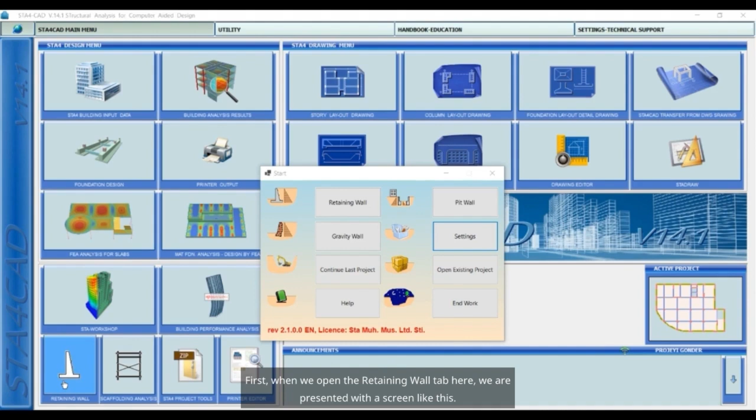First, when we open the retaining wall tab here, we are presented with a screen like this. On this screen, we initially encounter console type retaining wall structures. If there is such a retaining wall, you will solve it from here.

If you have a gravity wall, then you can select the option below. Here, you can choose your material as either stone or concrete. Alternatively, as shown here, we have the pit wall option.

If you have a retaining structure like this instead of that type, then you can model it using this option.

Besides that, we have our settings section here. From the settings section, you can adjust the language, and after modeling the retaining structure, it allows us to analyze and export drawings in DXF format. You can select the DXF format here.

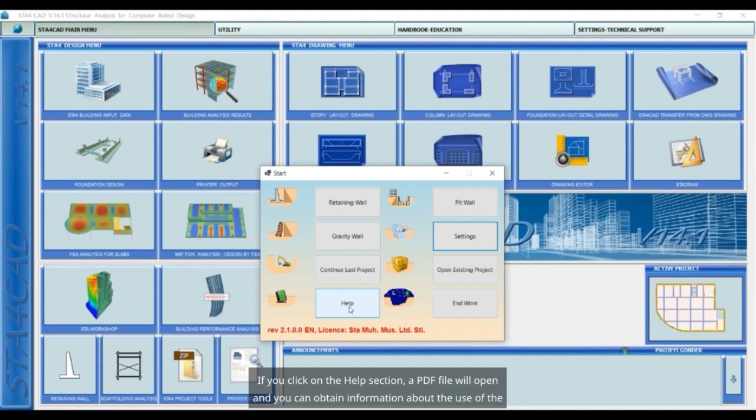In addition, we have a help option available here. First of all, you can get information from here before starting the retaining wall module. If you click on the help section, a PDF file will open, and you can obtain information about the use of the program through this PDF file.

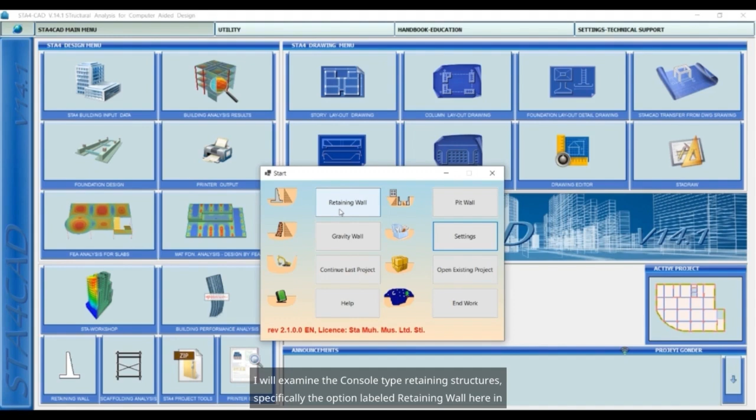I will examine the console type retaining structures, specifically the option labeled retaining wall, here in this video. Then I will briefly mention pit wall at the end and conclude my video.

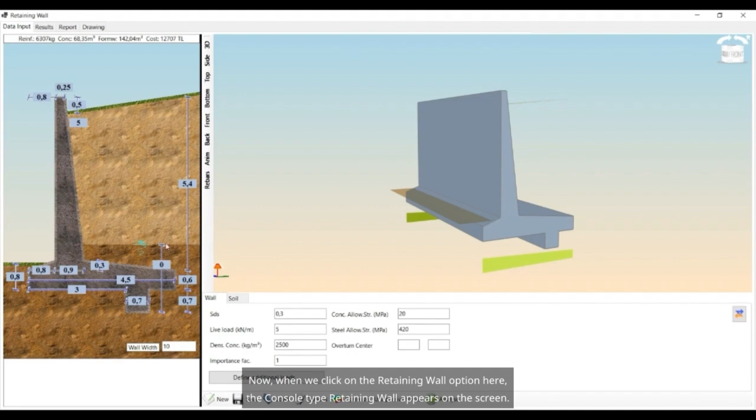Now, when we click on the retaining wall option here, the console type retaining wall appears on the screen. As you can see, there are dimensions here. We can play with the dimensions, change them from this section, and also select our wall width.

Here, we define the wall and ground properties. We input the seismic effects that occur here. If we have a live load, we enter those as well. Here, we input the unit volume of concrete.

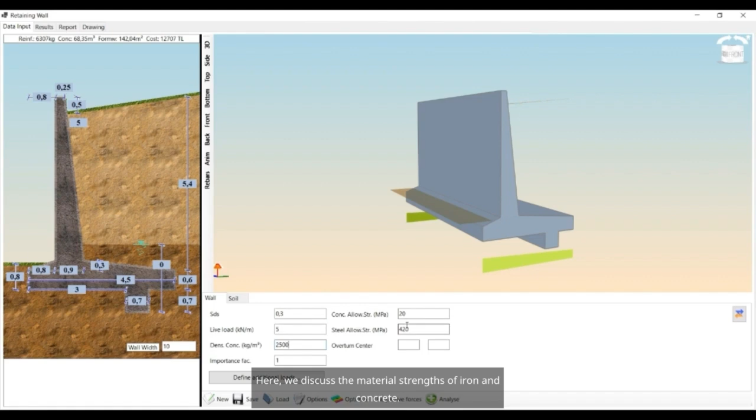Here, we discuss the material strengths of iron and concrete. Also, take a look at our overturn center section.

You do not need to enter any points here. When you do not enter any points, the program calculates for a lot of points by itself. It determines whether there is any sliding here, and for different center points.

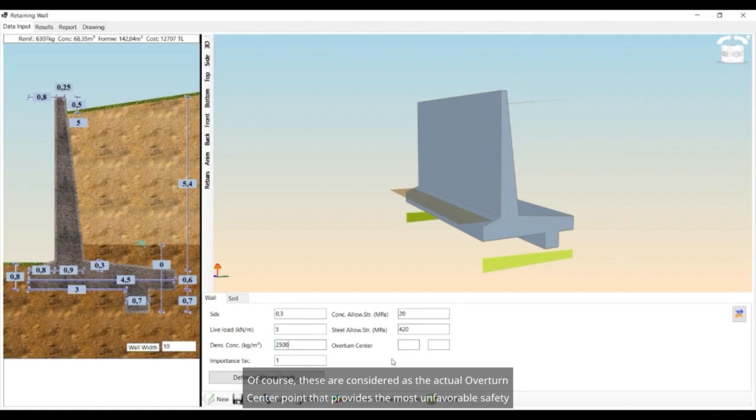Sliding surfaces are drawn considering different centers. Of course, these are considered as the actual overturn center point that provides the most unfavorable safety ratio. In other words, we are looking for the most unfavorable point here. But as I mentioned, you can also delve into any point you are curious about and examine the result there.

I will also leave the calculations to the program here. I will not directly enter any point myself.

Now, of course, if you want to open a new project, you can access these options from here. You can save your operations here from the load section. You can also call up a project you are currently working on and continue with the operations.

We have an options section. When you click on the options section, you can adjust both your static and design options.

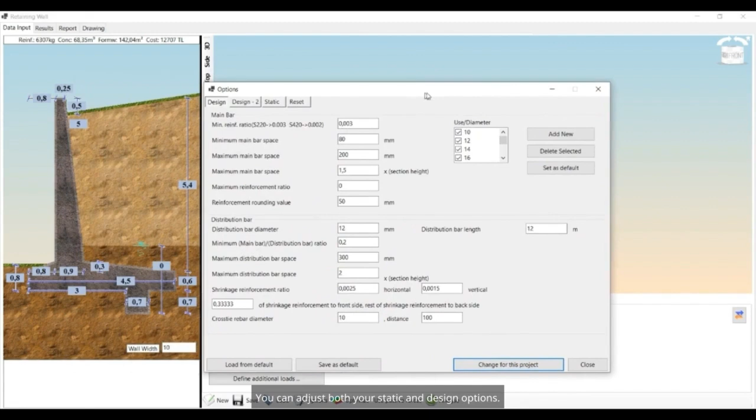You can select the reinforcement spacing and reinforcement diameters used here in the design section.

In the static section, our 2018 regulation is currently selected, and here you can see our safety factors. Here, for example, we have the wall overturning safety under seismic loading, and we take the coefficient as 1.3.

According to the regulations, what is actually mentioned here is as follows. For example, here we have an active soil load. This soil load is trying to overturn the retaining structure. The retaining wall resists this, for instance, with its own weight. It resists here due to the force created by its own weight, and the friction effect it generates on the surface. We are calculating the moments that attempt to overturn it.

We calculate the moments created by opposing forces. Here, the ratio of the moment created by the opposing forces to the moment created by the forces attempting to overturn must be at least 1.3 times. In other words, the safety factor that our regulation is referring to can be explained in this way.

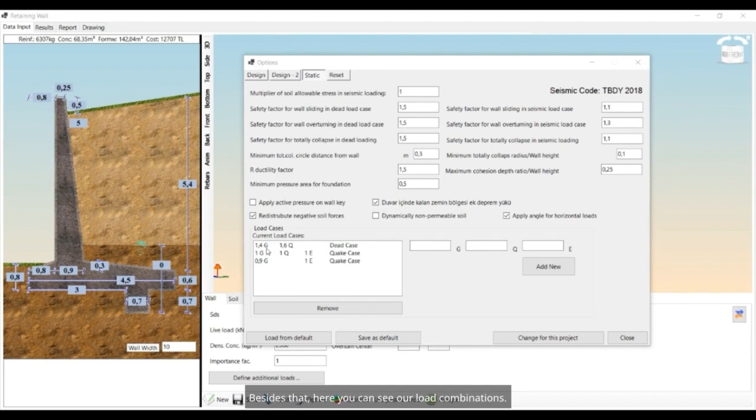Besides that, here you can see our load combinations. If you want, you can add different combinations and also view the resulting situations.

Yes, here, you can arrange these options according to whichever regulation you want. Of course, you can save this as a default setting or change it specifically for this project. Here, if you want the 2007 regulation, you need to click on that, and then click on this, like this.

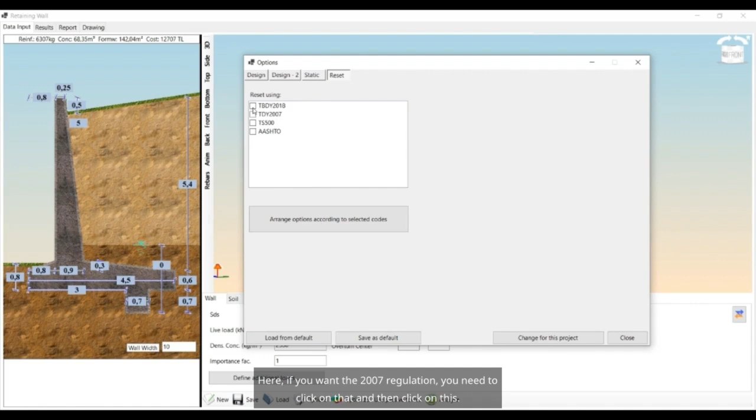Yes, we say to consider it according to the selected code. Right now, it has been considered according to the 2007 regulation. We are saying to change this for this project.

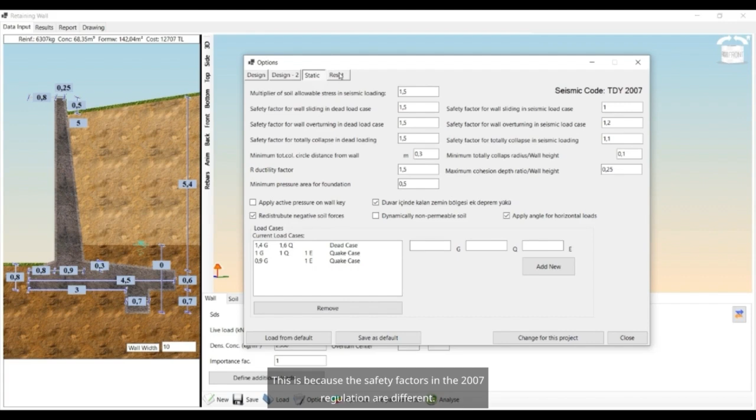So if we want to keep it as the 2007 regulation, we can do it this way. But if we want the default value to remain as the 2007 regulation in all projects we enter, then we need to click this. This is because the safety factors in the 2007 regulation are different, so it is taken into account accordingly.

Right now, I have brought it back to 2018. These are our options. Additionally, you can use passive loads here if you want, but if you don't use them, you will stay on the safer side.

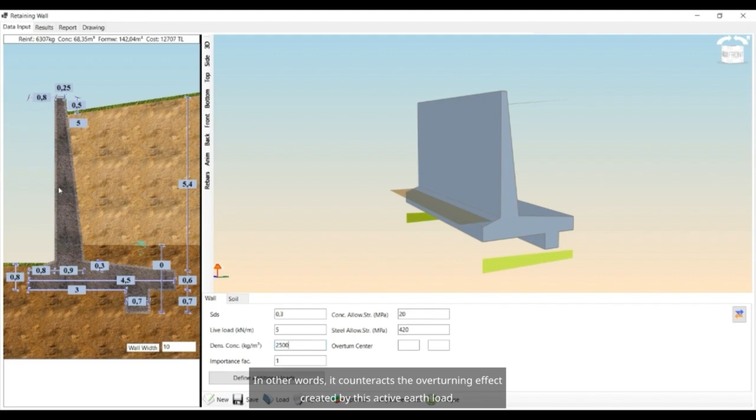Because passive loads are the effect of the soil here, the soil here is holding the retaining wall. In other words, it counteracts the overturning effect created by this active earth load. Here, a passive load is formed. If you do not take this into account, you will end up making calculations that are on the safer side.

Here, we have the option to optimize. When we click on the Optimize option, it shows us this. Let me explain right away.

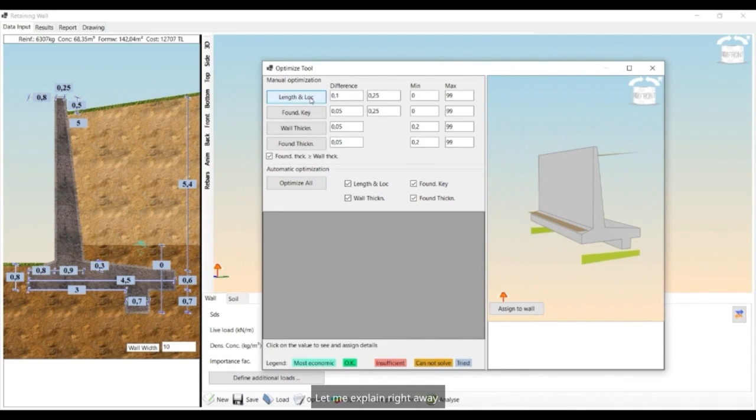Yes, at first glance, we have a lot of options here. Here we have the height of the wall. Similarly, we have the thickness of the foundation. Besides that, look here, we have our tooth optimization.

This is important. We have options related to tooth optimization and, of course, our base width here. Now, when examined, you can also have the program automatically optimize these, or when you change these values yourself, how does the optimization of the dimensions here work?

Here, in the first option mentioned initially, he talks about the foundation width. Here we have the difference section, which shows us the distances in between. Look, it goes with a difference of 0.4 and 0.5, meaning it varies by 0.1. In the horizontal part, it also varies by 0.25. This is shown here as well.

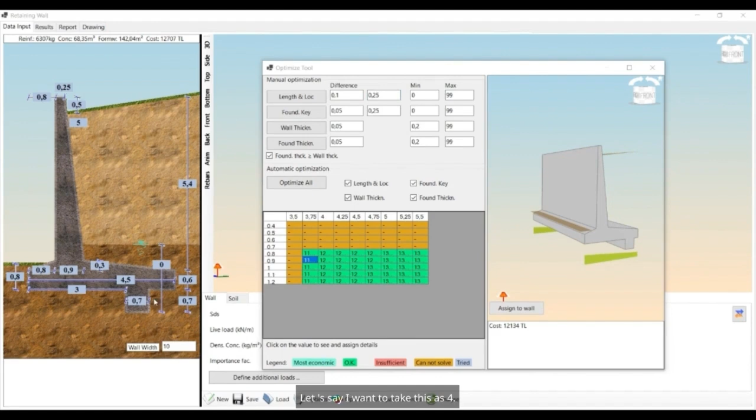It is actually optimizing these values. So right now, I have a value of 4.5 here. Let's say I want to take this as 4. What kind of result will I get when I take it as 4?

We will look at that now, and let's say I want to take this as 0.9 instead of 0.8, so here I am marking the option that corresponds to 0.9 and 4. When I mark this, I can also select a different sound option. Here, as you can see,

Changes are actually occurring in the relevant dimensions on this three-dimensional shape shown in the figure. Let me revert it to its original state. Yes, this is what I want right now.

And to implement this, in the project, I am checking the Assign to Wall option. This will assign these dimensions to the wall as well. As can be seen right now, I need to create a model like this.

There is no problem. The light is green, so it means okay here. It means you can do this. So, here, you can see the approximate costs.

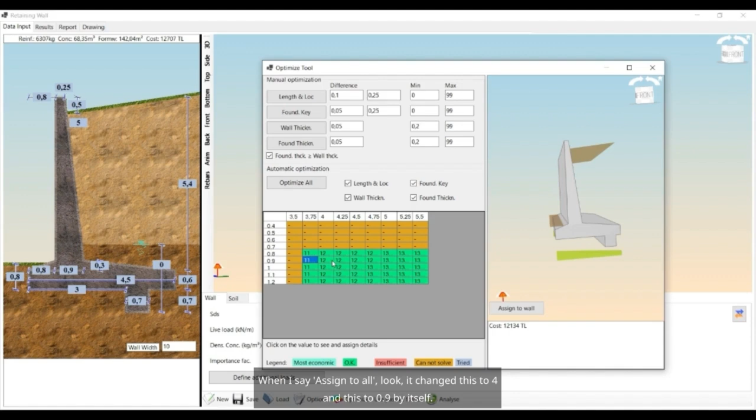Look, when I do it this way, the cost will be around 12,134 TL. This way, you can visualize the cost. When I say Assign to Wall, look, it changed this to 4 and this to 0.9 by itself.

In addition to this, as I mentioned here, we can optimize regarding the heel part, or you could say the tooth - we can perform an optimization related to this. Look at this 0.7 heel height. Here, the distance to the heel is 3 meters. You can optimize that. You can optimize the thickness of the wall, which ranges from 0.9 to 0.25.

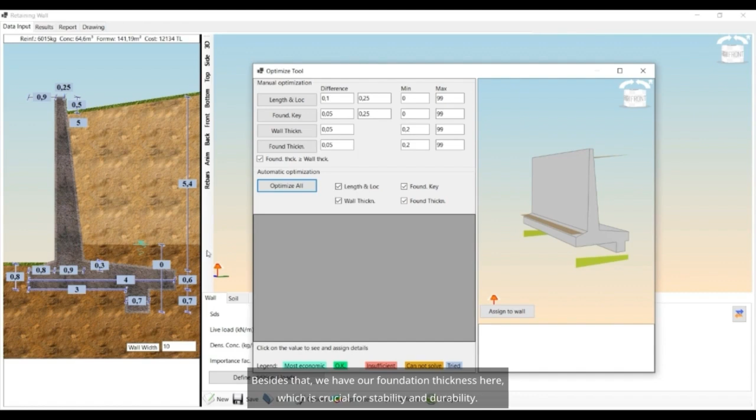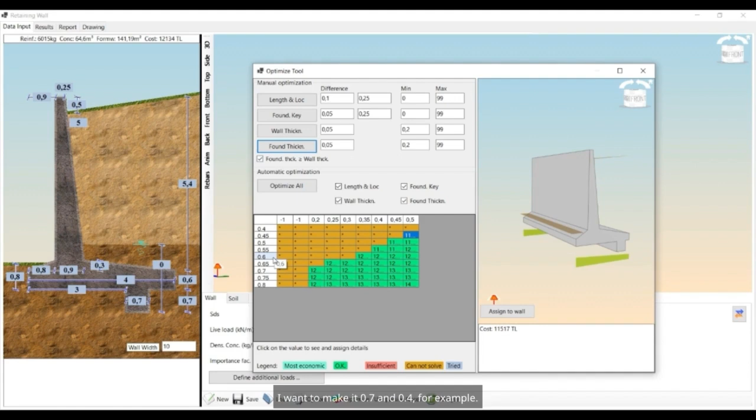Besides that, we have our foundation thickness here, which is crucial for stability and durability. At the end, when you come to the foundation thickness, yes, we have a thickness value of approximately 0.6 meters here, and a value of approximately 0.3 meters here. You would perform an optimization on these two values to ensure efficiency. I want to make it 0.7 and 0.4, for example.

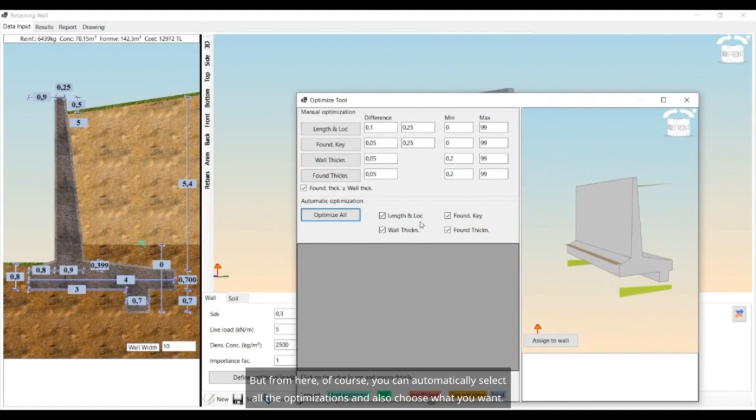I took this here, and when I clicked on Assign to Wall, as you can see, it changed these as well. But from here, of course, you can automatically select all the optimizations and also choose what you want.

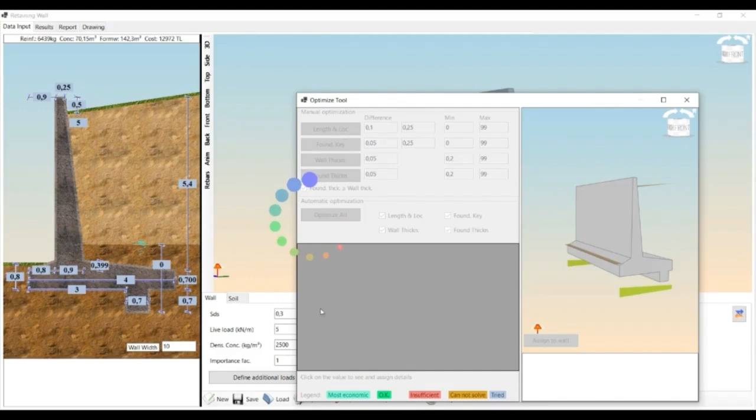You can also perform automatic optimization. It is currently carrying out the optimization, and according to that, it will adjust the dimensions. Finally, it will also display the cost for us, and you can view how much profit you have made from here. The program will automatically perform the optimization for you. Yes, right now look, the fees are written here, so there has been a drop of more than half. At this moment, I performed an automatic optimization.

Yes, I say OK here—if you say Assign to Wall, it will automatically assign this optimization result. I didn't take any action because I didn't want any optimization. If you want to do it, as I said, you can click on that option.

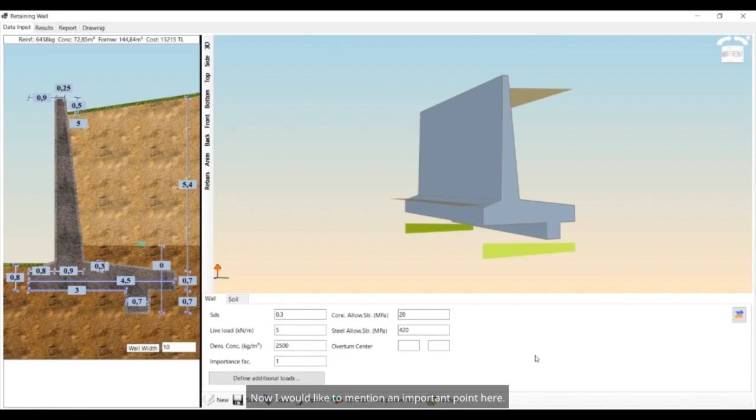Now I would like to mention an important point here. It is not very possible to save your retaining wall under high earthquakes or high elevations. When you encounter such situations, you will see that when your earthquake increases to a certain extent, or when you have a larger heel height here, you need to make the wall height much larger, and you will already notice that it is not sufficient.

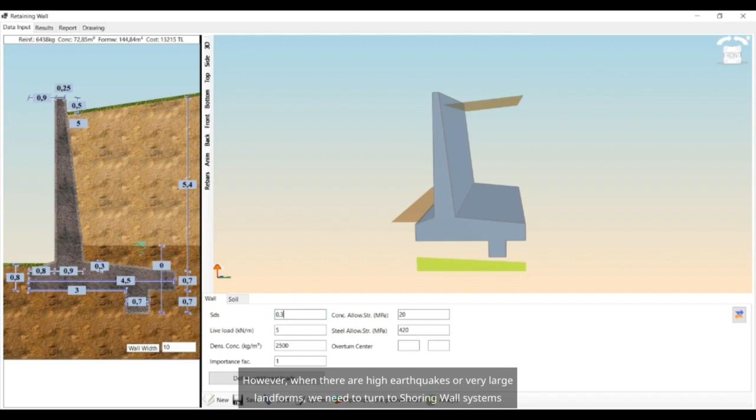In such cases, I took 0.8, and even that is currently not sufficient. For small earthquakes, you can certainly manage this by adjusting the dimensions. However, when there are high earthquakes or very large landforms, you need to turn to shoring wall systems instead of constructing a retaining wall. Otherwise, you will not be able to save the structure. Related to the modeling of the retaining wall in such situations, what you need to do is turn to the shoring wall system.

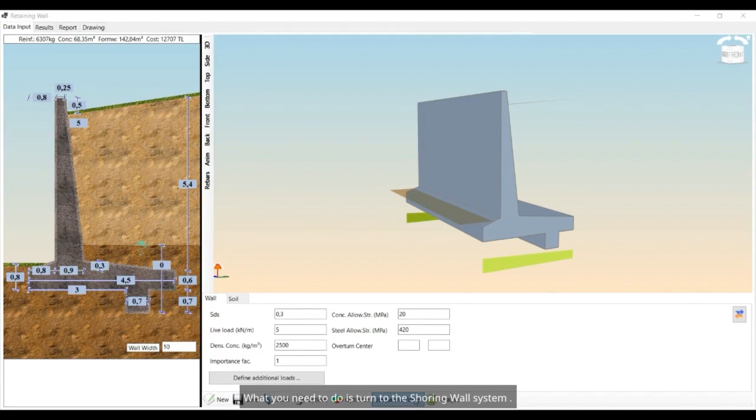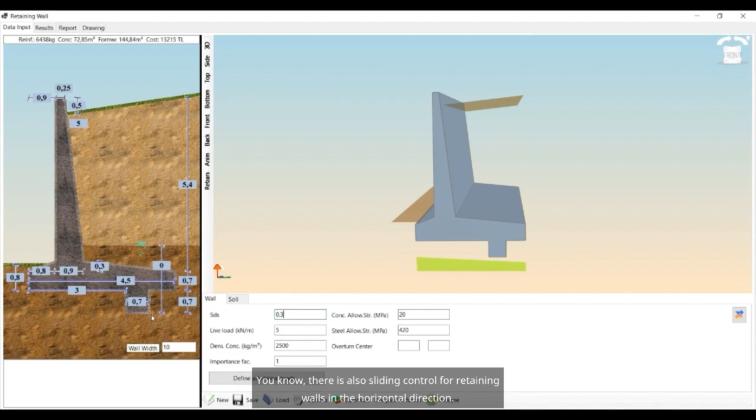Besides that, look here, this heel section is very important. The heel section especially has a braking effect, provides control against shear effects from horizontal forces. There is also sliding control for retaining walls. In the horizontal direction, your heel has a very important function against this slipping. Therefore, the height of this heel needs to be at a certain value.

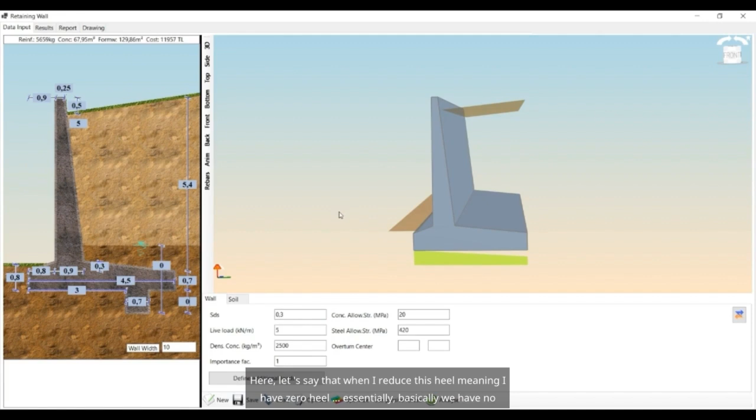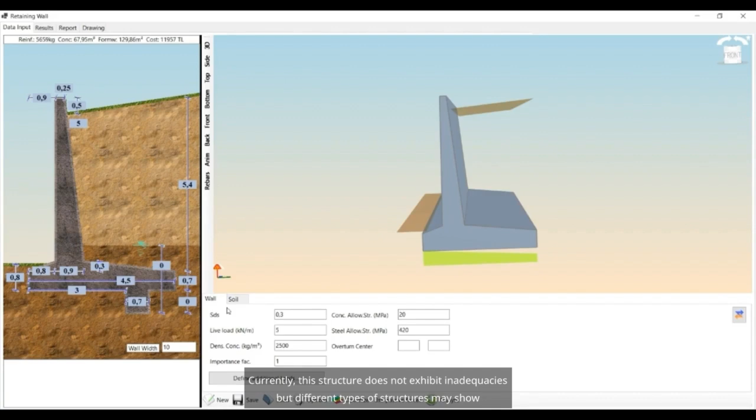Here, let's say that when I reduce this heel, meaning I have 0 heel, basically we have no heel. In that case, the likelihood of experiencing deficiencies is high, so it is beneficial to have some form of heel. Currently, this structure does not exhibit inadequacies, but different types of structures may show inadequacies. This is important—the support geometry should be understood. It's necessary not to deviate too much from this geometry.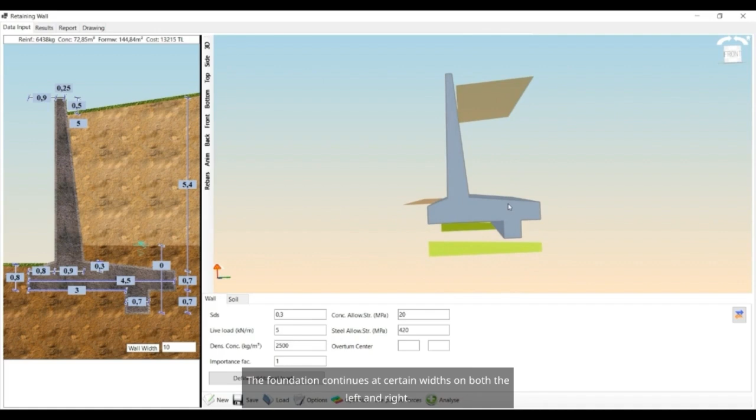Here, a wall comes from this point, and there is a section on both sides. The foundation continues at certain widths on both the left and right. Placing the wall in the corner and constructing it from only one side is not a correct approach. In other words, the wall must have a certain distance from both sides—it needs to be positioned in between. It cannot be at one endpoint. Such geometries are not a correct approach. It is important that you do not go outside of this geometry.

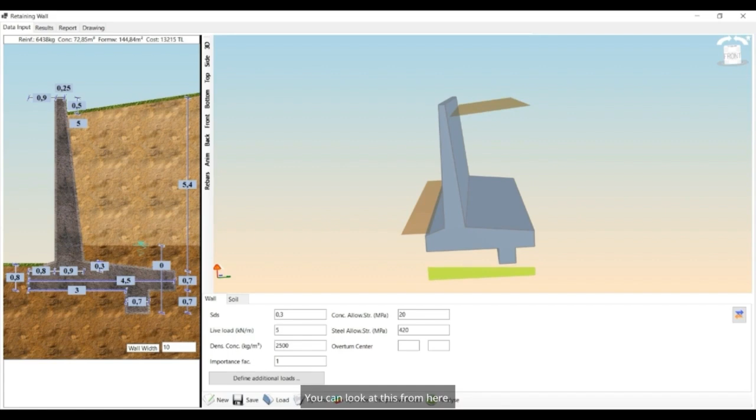Besides that, look here, you are also adjusting the angle. With this value, the soil loads are currently coming in at a slope of 5 degrees. For example, you set the angle to 10, and you can see that there is a change observed—you can look at this from here. That's why, as I said, when your earthquake loads become excessive, if you increase the height here, we will see that it won't help. Yes, this is what I currently have to say regarding the retaining wall.

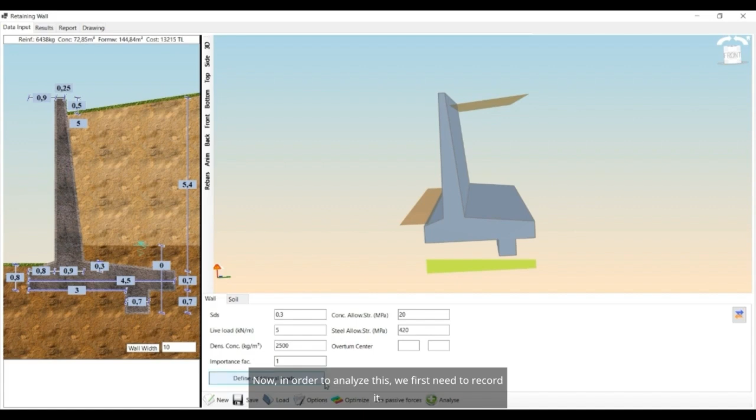Now that we have specified all the dimensions, we can move on to the analysis section. Of course, if we have groundwater here, we need to consider the groundwater level as well—I am currently assuming it should be present. Now, in order to analyze this, we first need to record it. Yes, if you press the save button. Yes, I will register a data here.

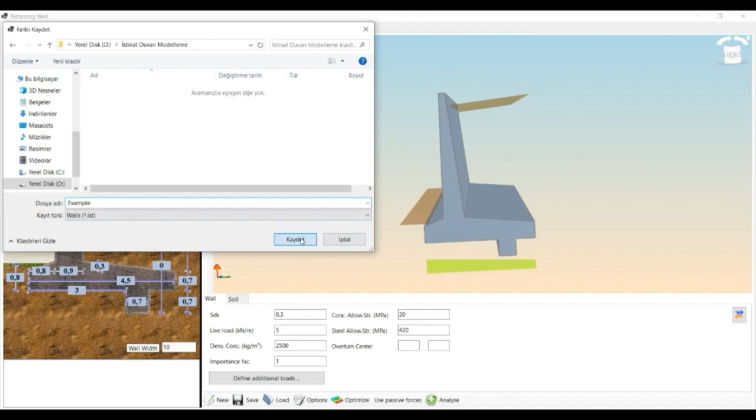Yes, my data is currently registered, and here I am pressing the Analyze button. He is currently performing an analysis. Yes, he has finished the analysis and has immediately presented the results to me.

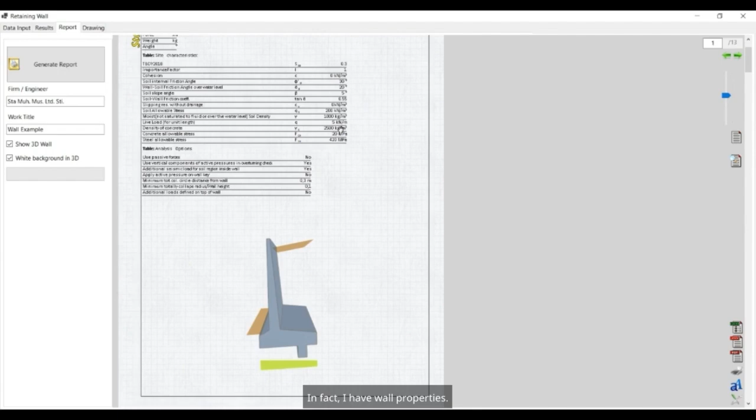Here are my element properties. In fact, I have wall properties, the selected properties found here. Here are my dimensions and the drawing. After that, the calculation section starts in detail. The loads are shown here. Here you can see the active soil load. An analysis is being conducted under these loads.

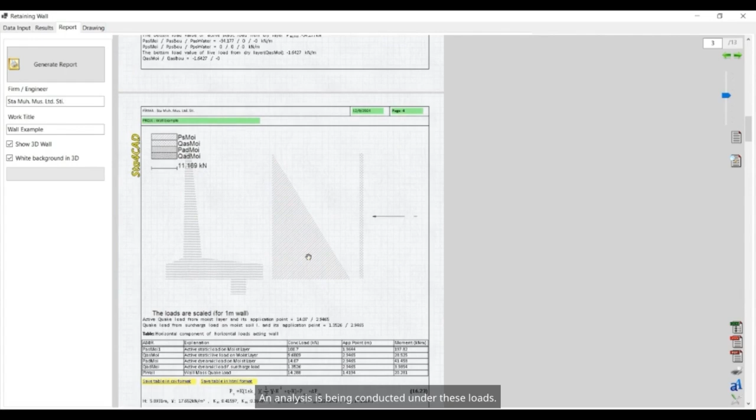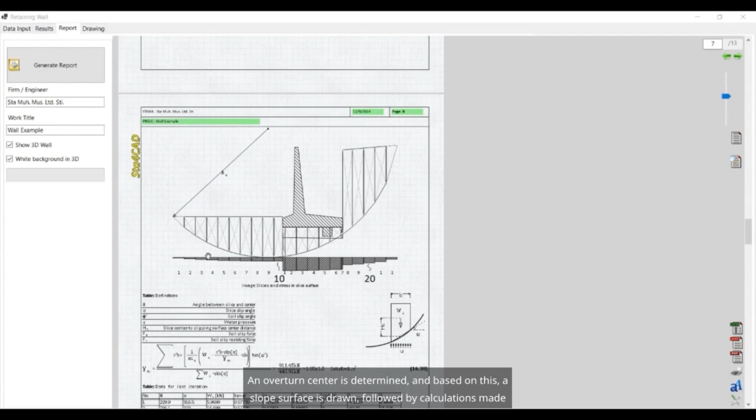Yes, as a result, you can see that wall overturning and sliding checks are being performed here. Yes, after these are done, take a look there. An overturn center is determined, and based on this, a slip surface is drawn, followed by calculations made with a safety factor.

This is calculated for both earthquake and non-earthquake conditions. Here it shows that it was done under earthquake loading.

We already went directly into the report here, but when we reach the analysis results, we also have reinforcements, etc. You can visualize these in the same way.

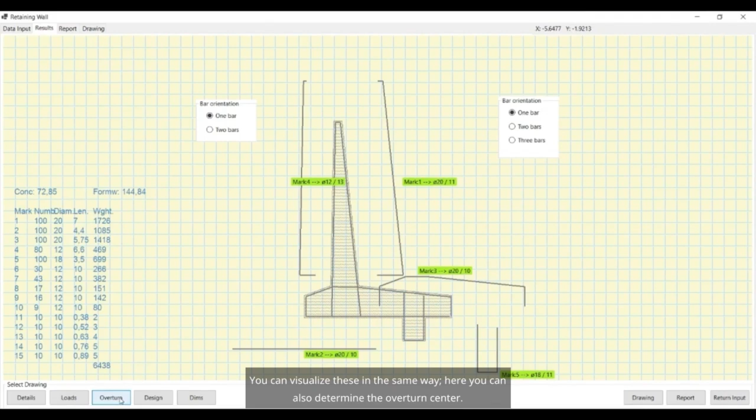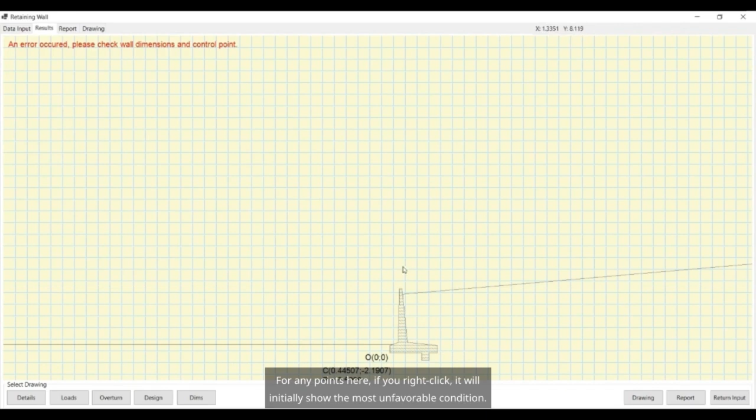Here you can also determine the overturn center. Click on any point, you can check it yourself. For any points here, if you right-click, it will initially show the most unfavorable condition. In other cases, it will be larger anyway.

The factor of safety section here is important. You can see that, these are already written here. A lot of schematic lines have been taken and it is written under the conditions that arise from them.

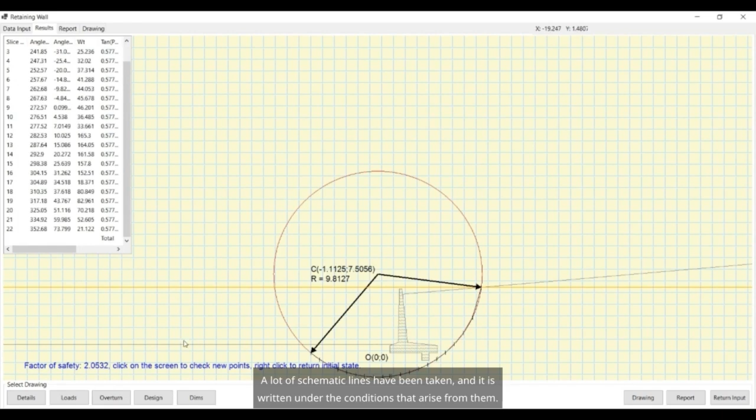Here in the design section, you can see that we have our reinforcement. It states the required area here as well, which is 8.4 square centimeters. Based on this, you can change the reinforcement selection yourself.

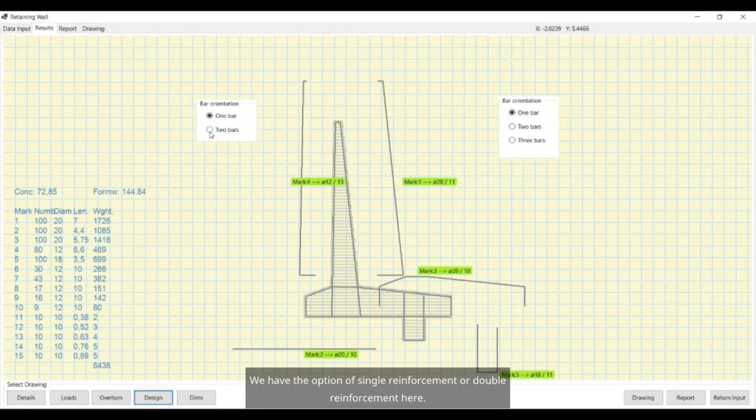Here, your quantity takeoff is also being done. This is important. We have the option of single reinforcement or double reinforcement here. You can specify these as you wish, and accordingly your quantity takeoff will change somewhat.

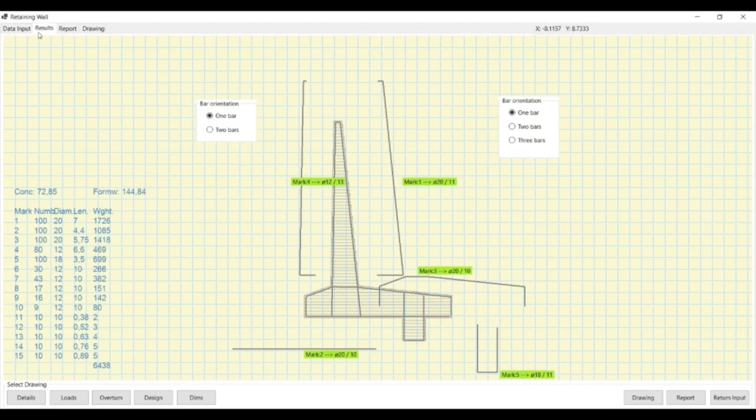You can select these. These are important. Besides this, the report shows the reinforcement. After these have been provided, the given reinforcements are written here as a report.

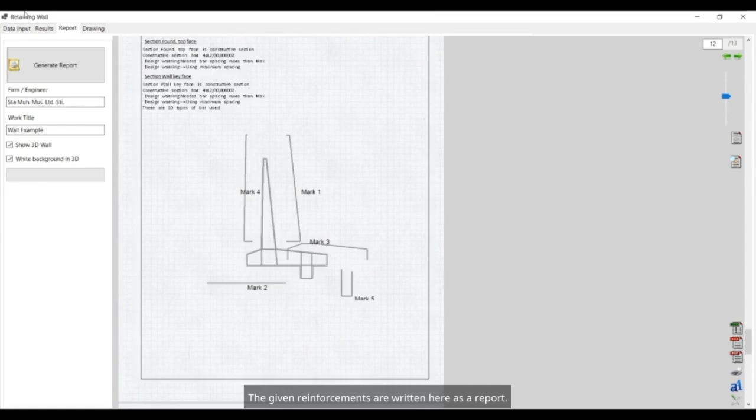Here, I actually want to point out a specific aspect of the data entry. If you are going to apply an extra load, you can enter it yourself here. Let's say you will enter a vertical PV load or a horizontal PH load.

You can divide these by the relevant wall width and treat it as a single dynamic load. You can also define an additional load.

Let's talk about the natural wall properties here. We also had soil properties, these are important as well. The data pertaining to our soil is here.

You need to enter the specific weight of the liquid. Besides that, let our specific weight of the moist ground be entered. Of course, this part is very important.

There is the friction angle of the ground surface here. We also have the shear resistance angle here. These are important factors, we need to enter them correctly.

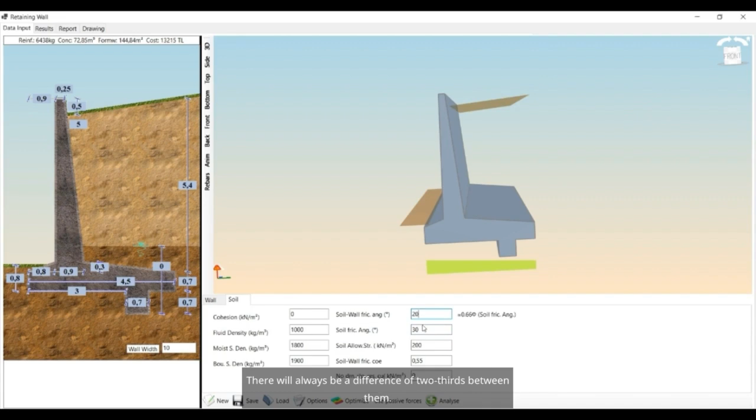Here you also need to enter a value in the first option that is 2/3 of the value you entered. There will always be a difference of 2/3 between them. The friction angle of the ground surface needs to be 2/3 of the shear resistance angle.

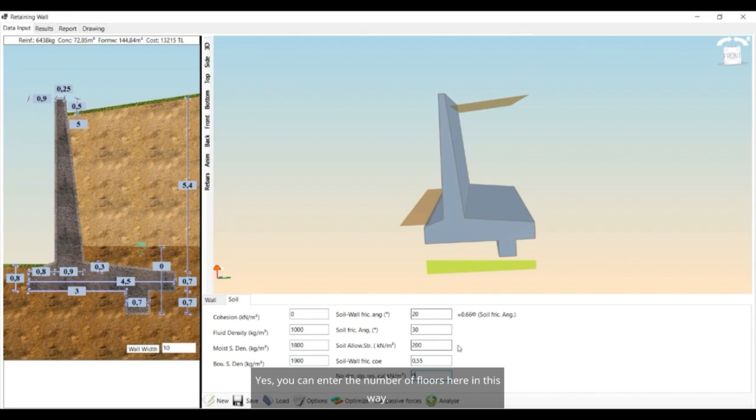Now, regarding the analysis results, yes, you can generate a report in this manner. As I mentioned, you can print the report as a PDF from here. If you are looking for something specific in the report, you can find it by typing its name here.

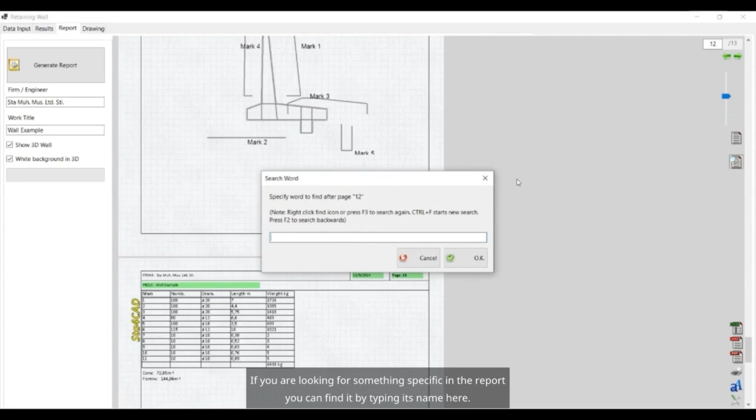You can zoom in and out of the screen a bit here. Features like this are available.

Yes, now we come to the drawing section. Here, in the drawing section, look here. Yes, it immediately creates the drawing.

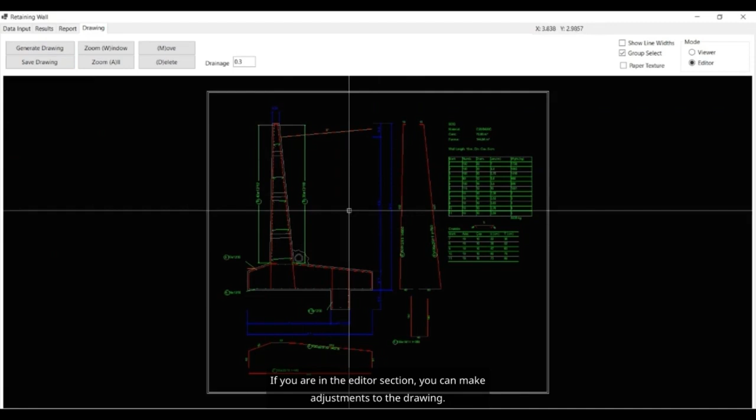This is important. If you are in the editor section, you can make adjustments to the drawing. You will carry it here and you will delete it. These options will be active.

You are in the viewer part and these options are available. You cannot do these actions. Here you can only view.

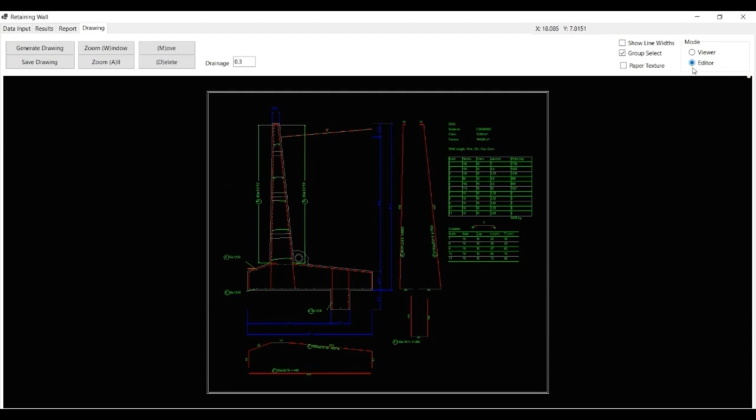Yes, right now, when you click here, it also thickens our wall here and makes the drawings accordingly. This is very important. When you click on our option at the very bottom, notice that it displays the screen.

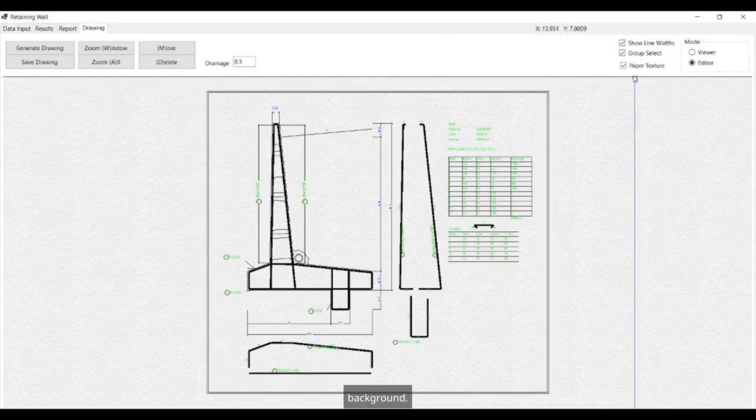Here on a white background. If you close it, the paper texture part - that is, when you create the paper texture, it shows up here in white. You close this, and you can also get it in black like this.

This is important from this perspective. Here, you can also make a choice, and as I mentioned, you can carry out the transportation.

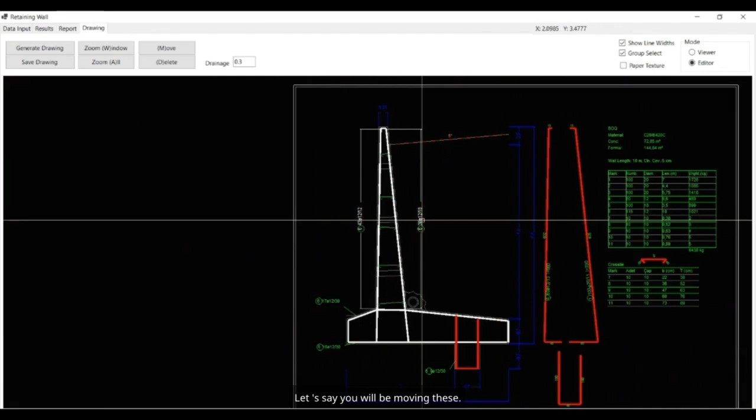Yes, you need to select the part here first. Let's say you will be moving these. After selecting them this way, you will confirm.

Where do you want to move this part? Accordingly, you can take it and move it to a different place from here. I mentioned this as an example and demonstrated it.

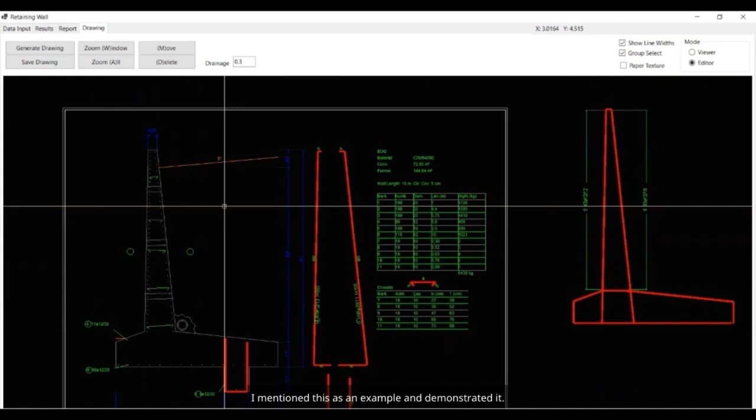Besides that, of course, you can save the drawing. Here you can save files in the DXF format and open them this way.

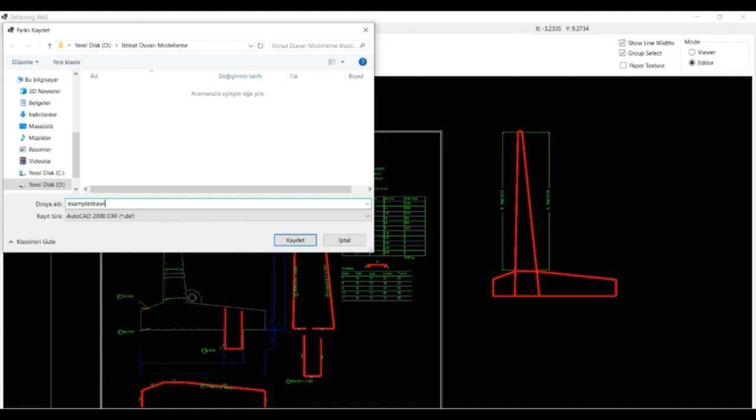Yes, this way he has also saved the drawings. Overall, these are my comments regarding the cantilever-type retaining wall modeling.

Now, I will provide a brief overview of pit wall modeling and conclude my video.

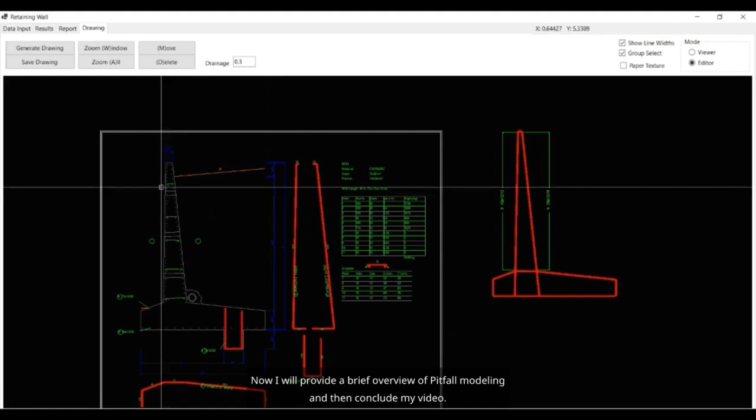Yes, now I will provide information about pit wall modeling. Here, these structures are generally types of retaining walls used to hold the soil or ground in a short-term manner.

There are various types of retaining structures. If you want to build a long-term retaining structure, then you should not use the pit wall option.

The data entries here are the same as those for cantilever-type retaining structures. There is no change in the situation.

Another point of difference is that there are two solution methods: a classical solution and a finite element solution. Additionally, we can of course add stages here. These are the most fundamental differences.

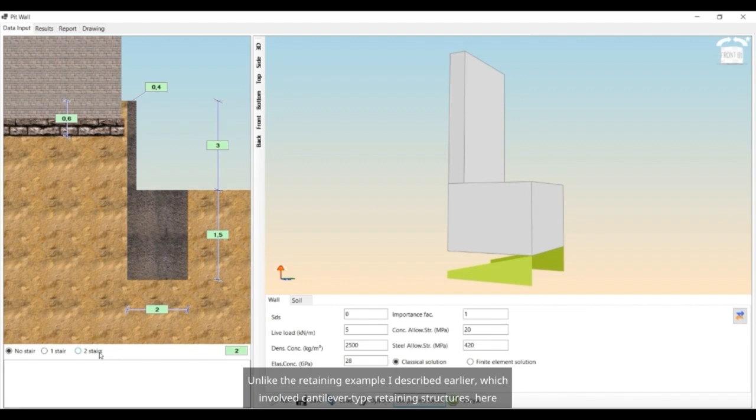Unlike the retaining example I described earlier, which involved cantilever-type retaining structures, here it generally occurs as follows.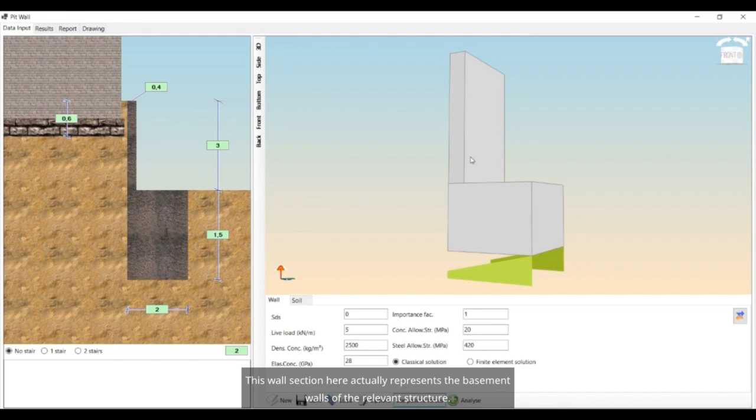Here, the foundation part sits here. Generally, the foundation of the relevant structure sits here. This wall section here actually represents the basement walls of the relevant structure. The foundation also sits here. The general logic is also like this in pit wall structures.

One important point here is that passive forces must definitely be taken into account. This part is very important and must definitely be considered. We marked this for that reason. There is actually no step, but if you want, you can also add a step this way.

I would like to talk a little about the solution methods here. The classical solution operates as seen in the previous example of the retaining wall structure. It does not consider the ground as elastic at all.

When we perform finite element analysis, it determines a point through iteration, and the part above this point behaves in a non-elastic and non-linear manner. It has determined a specific point on the pit wall, and from this particular alignment onward, the part above behaves non-elastically while the part below behaves elastically.

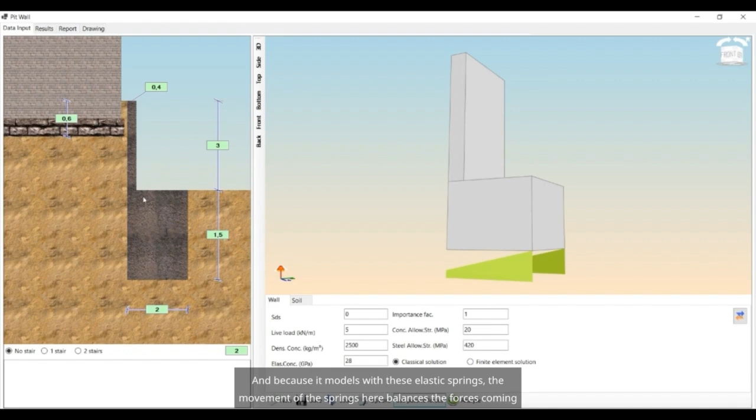After making the determination, the program models the portion of the rigid concrete structure below that line with elastic springs. Because it models with these elastic springs, the movement of the springs balances the forces coming from the inelastic part above. In other words, all types of force calculations are accounted for, so there is no need to include any safety factors or anything like that here. All forces are directly addressed in this way.

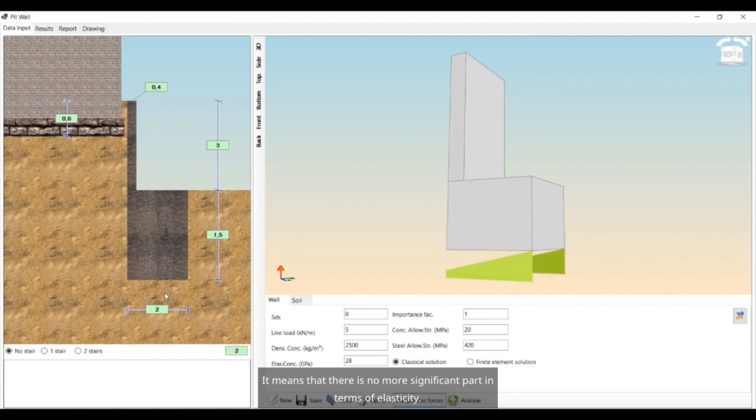One of the most important differences here is this: however, if the point found through iteration appears at a lower level, let's assume at the very bottom, then it indicates that the structure is becoming less than fully elastic, meaning there is no more significant part in terms of elasticity. In that case, the process is already being carried out like in classical solutions, and there is no difference occurring there.

Of course, in order to determine the point that will be elastic and to place the elastic springs below it, the earthquake must be zero. If the earthquake is not zero, this cannot be done. Now we can change the dimensions.

Here, as we mentioned, just like in the previous model, first I will create a solution according to the classical method. If there is a negative situation, it still comes out the same.

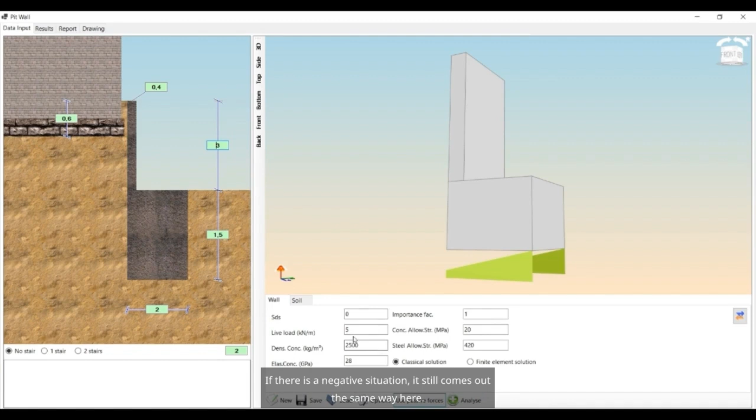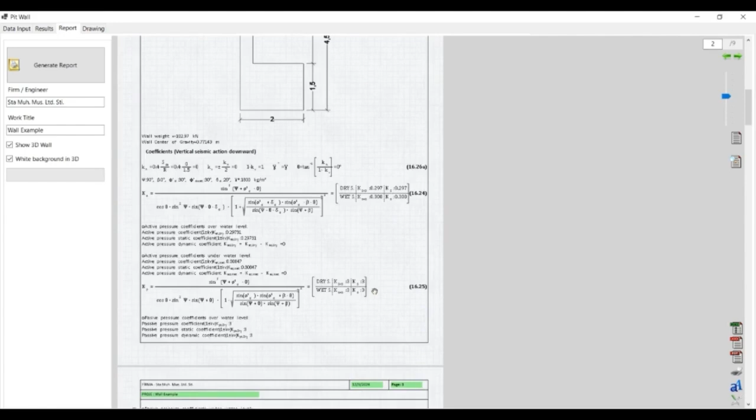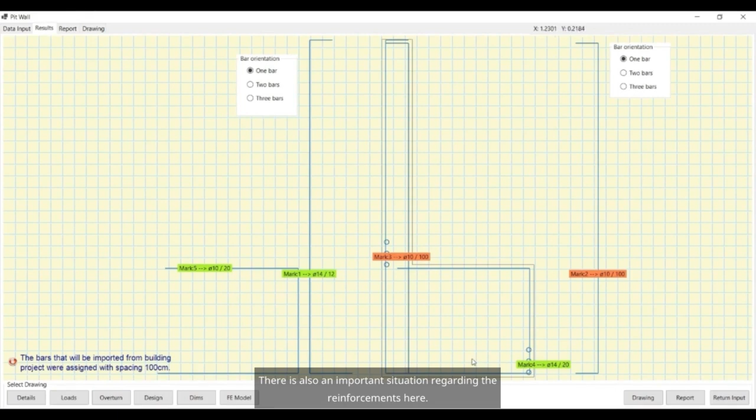There is also an important situation regarding the reinforcements here you see. The engineer needs to input these themselves. These are reinforcements at 100 centimeter gaps. The reinforcements here are those coming from the superstructure, so the engineer needs to personally address these reinforcements that are highlighted in red.

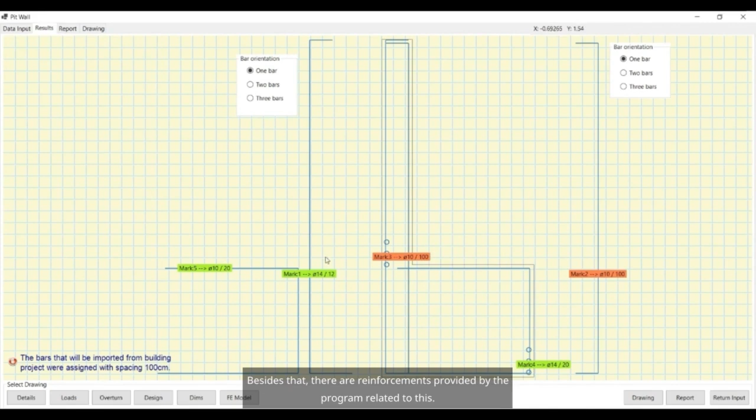Besides that, there are reinforcements provided by the program related to this. For instance, it is placing a constructive reinforcement in this foundational part concerning the retaining wall. Here we already have our shear reinforcement, and this type of reinforcement is being used. Similarly, we can also make a dual or triple selection. Here, the reinforcement drawing is done in the same way.

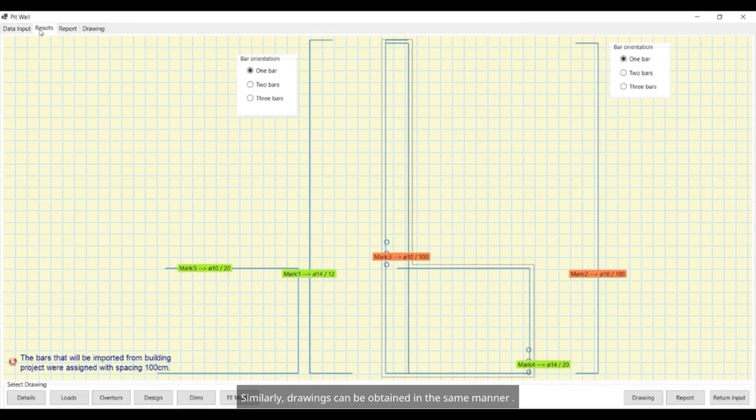Now we have stated the results. Like this, the report can be prepared in the same way, and similarly drawings can be obtained in the same manner. Also, just like in the previous example, it follows the same logic. Look here, you can call the drawing and obtain it here.

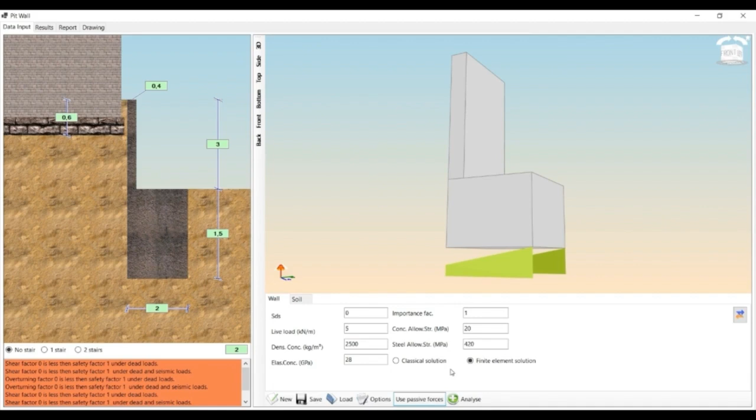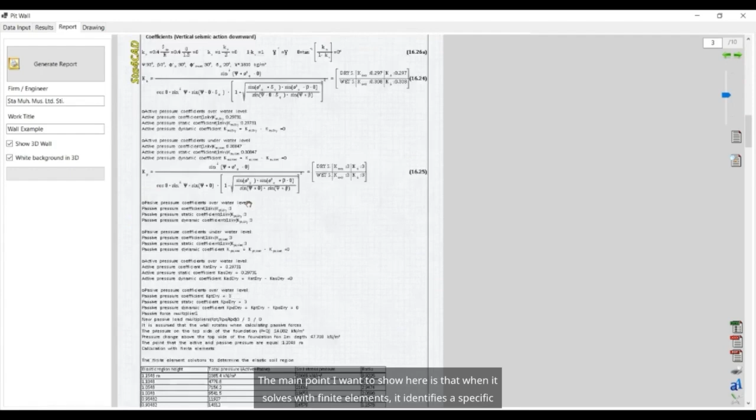Yes, now I want to solve it using finite elements. I am analyzing here. Yes, the analysis is now complete. The main point I want to show here is that when it solves with finite elements, it identifies a specific point.

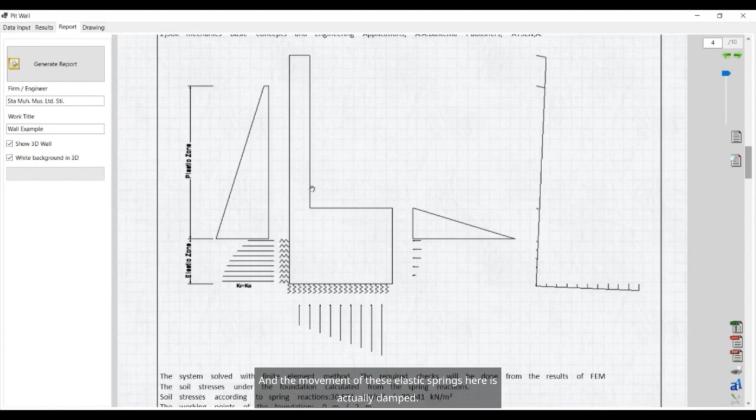If we zoom in a little more, yes, the remaining part underneath here is taken elastically, and look here, elastic springs are being loaded. The remaining part is considered as the inelastic part, and the movement of these elastic springs here is actually damped. Well, the logic here is based on that.

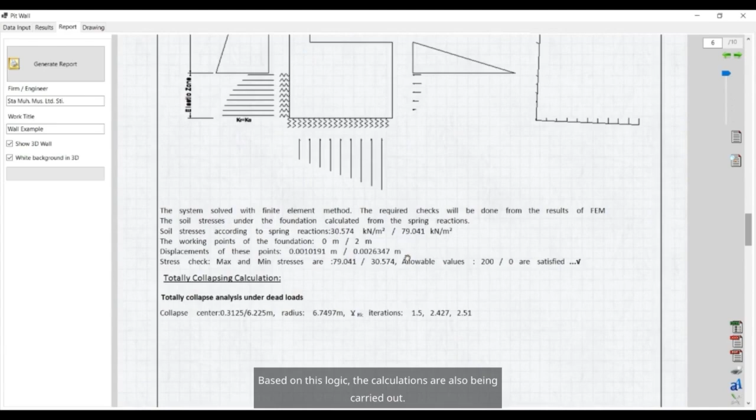Yes, you see the first task here. Based on this logic, the calculations are also being carried out.